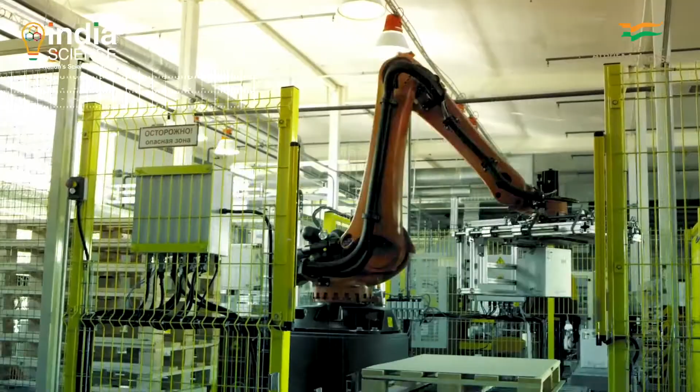With advances in technology, robotic automation is transforming the way we live and work, our efficiency and our safety levels. It is set to become the driving technology underpinning a whole new generation of autonomous devices that could provide the missing link between the digital and the physical world.

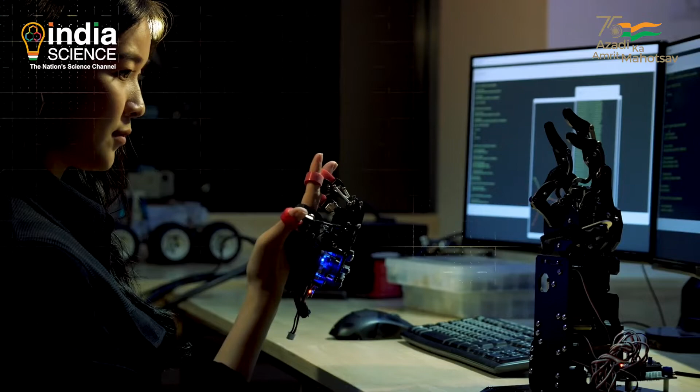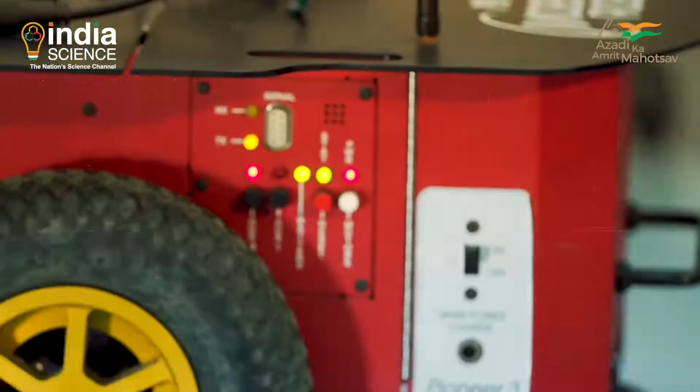How is India going to make this transition? How do we stay globally competitive and switch to smart manufacturing? What new science and innovation will power growth in this sector?

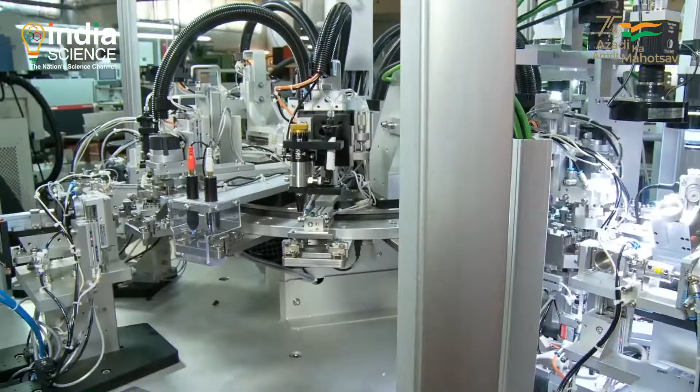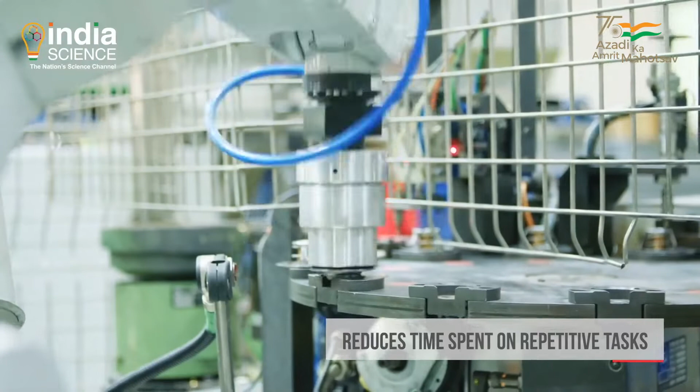Robotics is already a driver of competitiveness and flexibility in large-scale manufacturing industries. It improves worker prosperity by decreasing the time spent on exhausting, repetitive undertakings. Secondly, it improves the nature of work done as mechanical automation infers a decrease in human error.

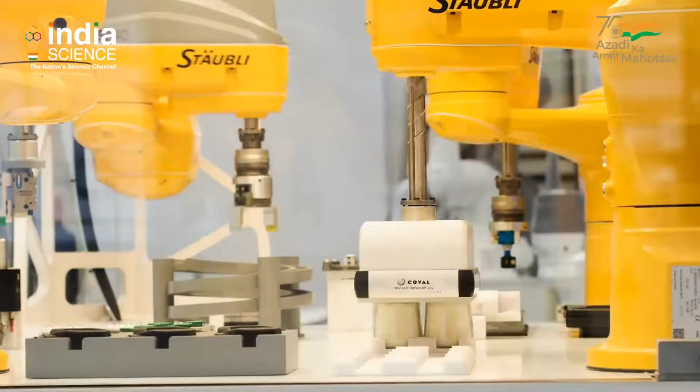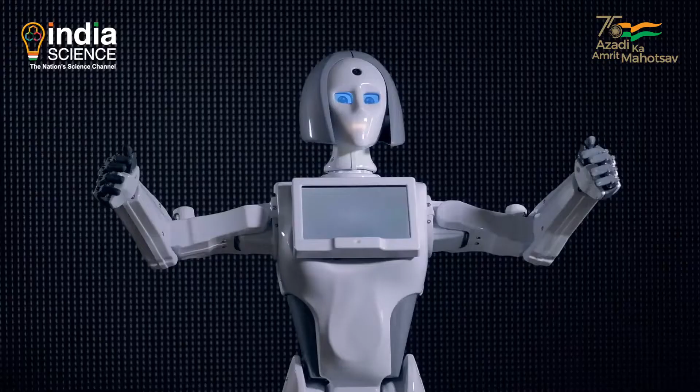The number of robots in use worldwide has multiplied threefold over the past two decades to 2.25 million, according to a June 2019 report by Oxford Economics. Trends suggest the global stock of robots will multiply even faster in the next 20 years, reaching as many as 20 million by 2030.

Robots are quickly moving out of controlled environments into homes and public spaces. In fact, researchers are also developing artificial intelligence systems that will allow robots to make decisions autonomously.

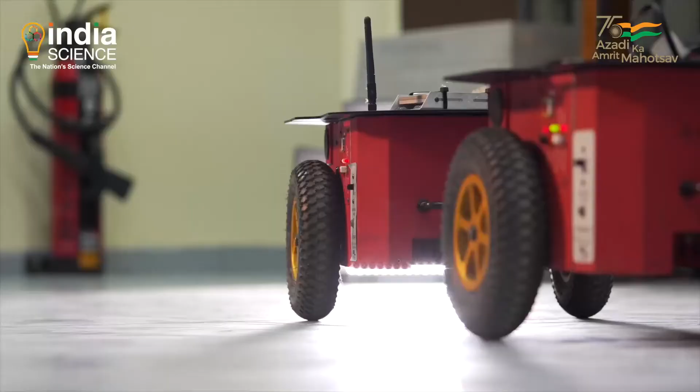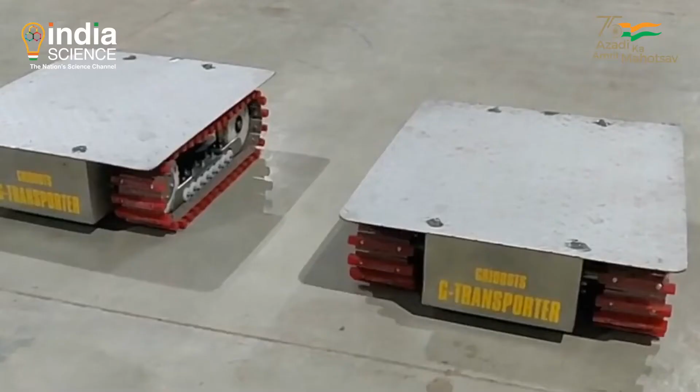Despite the fact that India has just 3 robots for each 10,000 workers, the homegrown robotics industry is developing at a remarkable rate. After the start of Make in India 2.0, many companies have come forward with their innovative ideas for robotics.

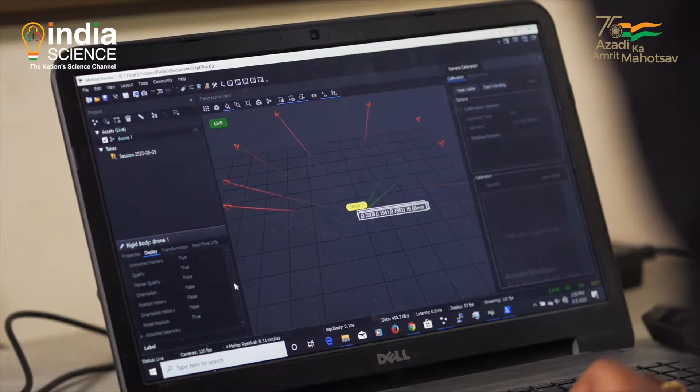One such company is Gridbots. Gridbots is an Ahmedabad-based company that was established in 2007. The company works in the field of robotics, specifically artificial intelligence and machine vision.

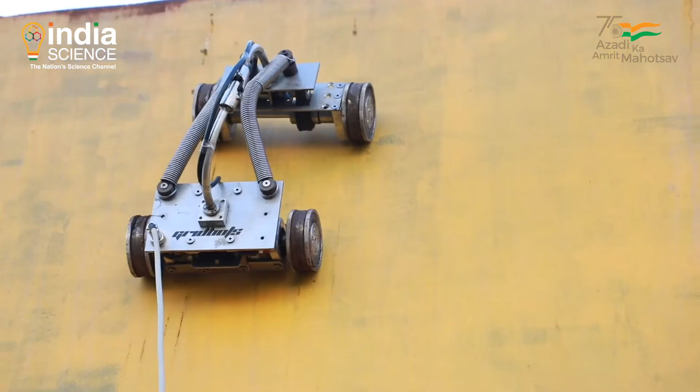The company develops robots that can be used in the industry for a variety of applications like dimension measurement, sorting and grading. Such robots are also used in outdoor work, such as surveillance in different kinds of terrain. They are capable of planning and navigating autonomously because of an inbuilt engine called the Grid Eye.

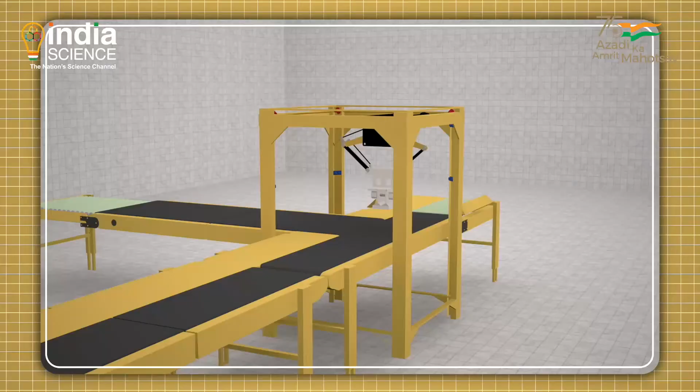Let's see what a Grid Eye engine is. The robot is able to process inputs from a range of sensors and cameras and can then plan out effective responses and actions, which include managing safety standards.

Grid-Eye engine is the outcome of 15 years of research in the field of robotics, machine vision, and artificial intelligence. We have been using multiple sensor feeds like 2D cameras, 3D cameras, LIDARs, monocular cameras, stereo cameras, and trying to build an algorithm which can help a machine perceive its environment the way a human being does.

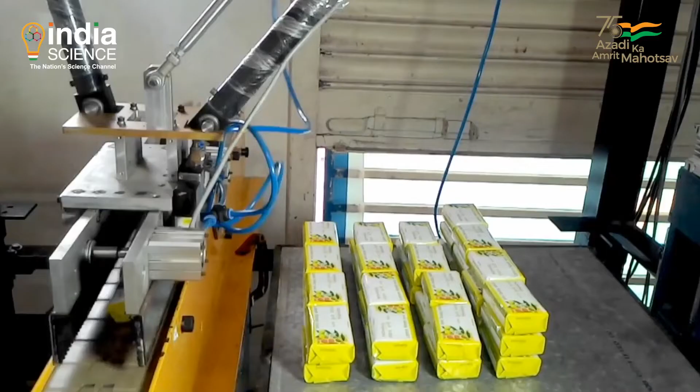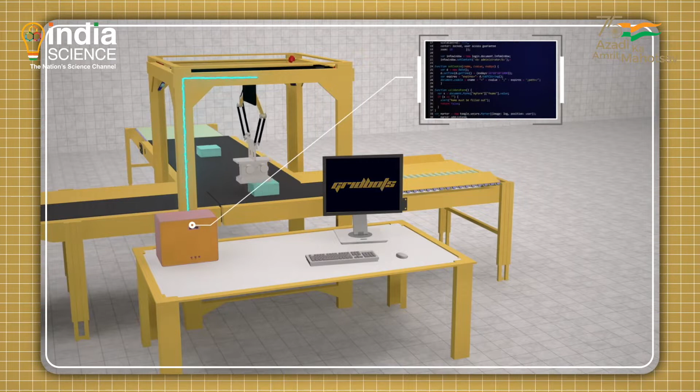How exactly does this work? There is an algorithm that helps the robotic device assess the environment and collate data from it. The data is then sent to the processing engine, which filters out the required data and processes it at a very high speed. Based on the data, the robot undertakes the task. The processor has a high level of accuracy that helps these robots to work efficiently and safely.

First of all, you have to identify multiple objects which are present in the video and then segment them, exactly how they are positioned in the 3D coordinate system, and then take actions. This has to be done in a fraction of a second, which becomes very challenging for today's hardware without a very good algorithm or software running at its core.

With Grid-Eye, we have been able to solve this problem. Today, most of our robots are being powered with the Grid-Eye engine, which helps our robot to work in the industry the way a human being or a human laborer works.

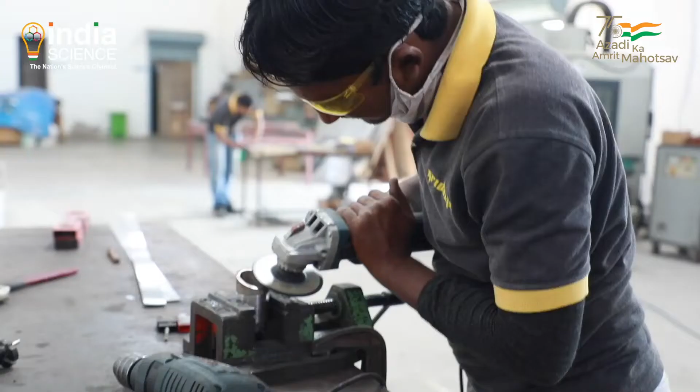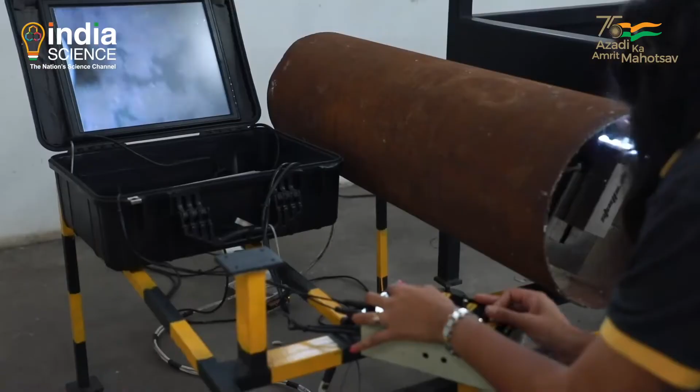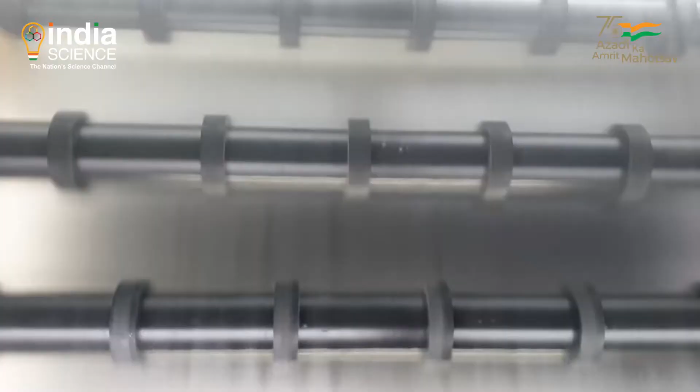The team at Gridbots creates robots, designing them to suit a customer's specific requirements. With indigenous research and manufacturing capabilities, Gridbots has deployed robots for almost all segments of industry and is targeting international markets. Some of the sectors where our robots are operational are glass, solar glass industry, manufacturing industry, food industry, pharma industry, electronics manufacturing industry, and warehousing.

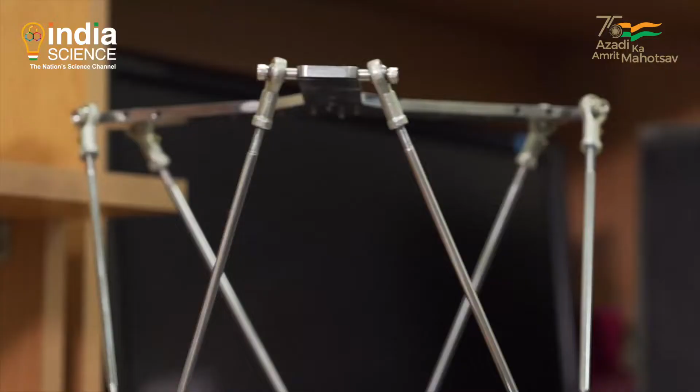What defines the company is their research and development. About 80% of their revenue goes to R&D. The robots made by Gridbots are economical, costing a fifth of those available in the market.

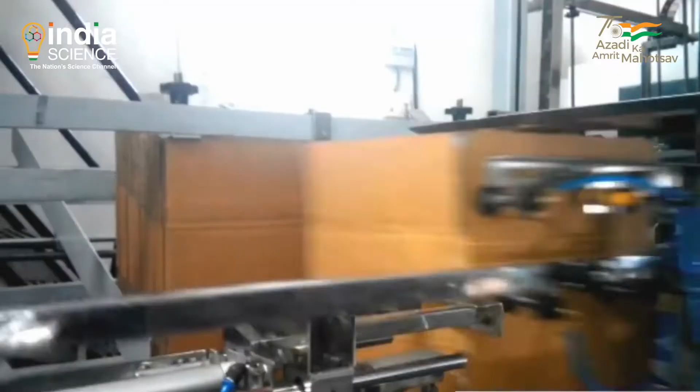You need to have an edge over your competitor. That edge can only come with dedicated, in-house research, which has to be there with every industry. These industries should be investing a lot in research and ensuring that their products, services, or technologies are way ahead of their closest competitors. That is the only way to survive and to grow with this vision of Atmanirbhar Bharat.

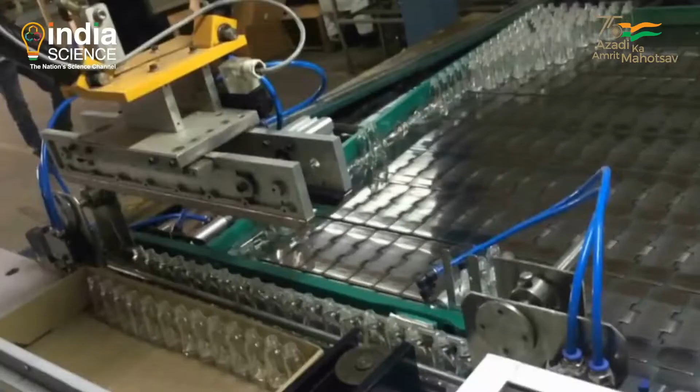Gridbots helps a lot of different industries by providing robotic solutions and machine vision that increases efficiency, working speed, and helps clients reach goals in a time-bound manner.

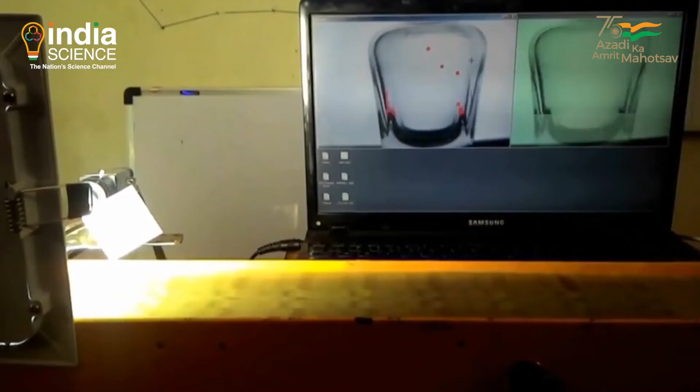First, the Gridbots engineers visited our factory, our warehouse, and then they came up with the solution. They elaborated that they have a system capable of automatically transferring material, and that robotic arm is also capable of picking material from the ground or at some height.

Around 90% of their work is for the government. Their customers include the Ministry of Home Affairs, the Indian Navy, ONGC, ISRO, IIT Gandhinagar, etc.

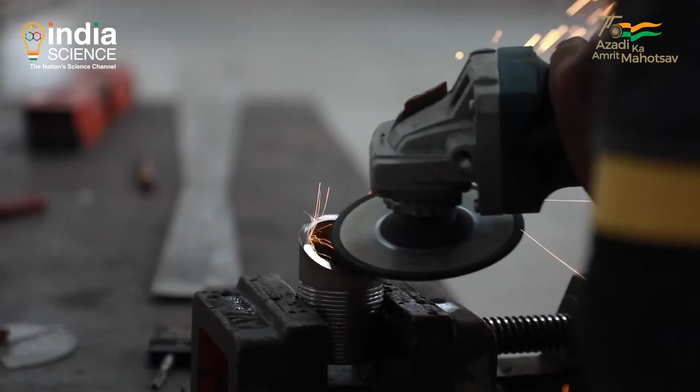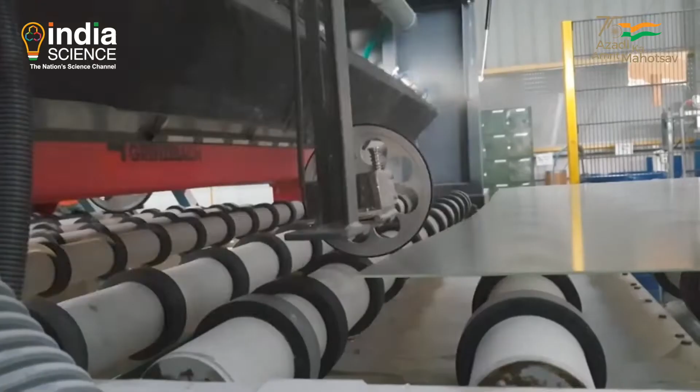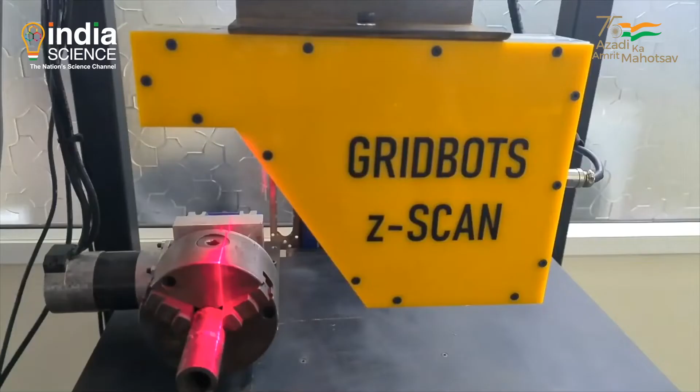Apart from making robots for different applications, Gridbots also works on machine vision systems, in which they make various products under different categories. A range of inspection systems including glass inspection, welding inspection, fabric inspection, and 360-degree tube inspection solutions are made. Geometric MegaView, MicroView, and Z-Scan solutions are developed under dimension measurement solutions. A range of vision systems are developed to cater to different applications in various industries.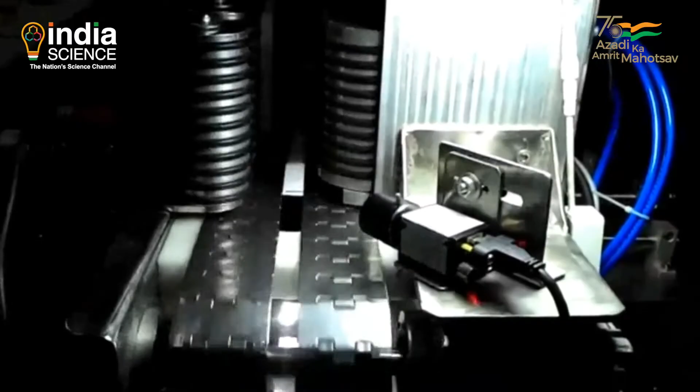Over the years, many such products have been developed that have been sold within the country and even outside the nation. When we say Atmanirbhar Bharat, we are talking about competing in global markets. In the global markets, we know that there are big players already established. What we are talking about is the volume first, the quality of the product second.

When you're talking about quality of the products, at that point it is necessary that we switch the traditional way of working and adapt ourselves to something which takes care of the quality and the volume autonomously. Automation is the way to go.

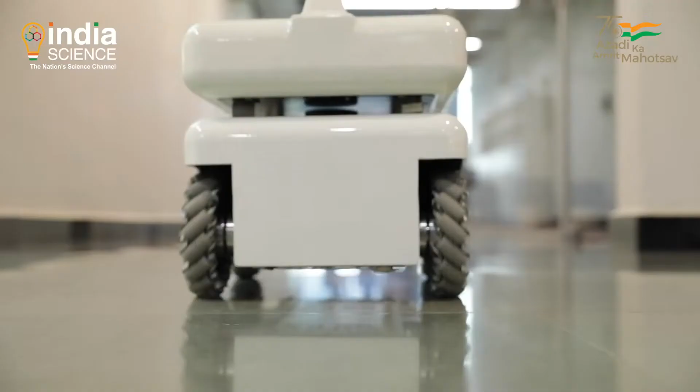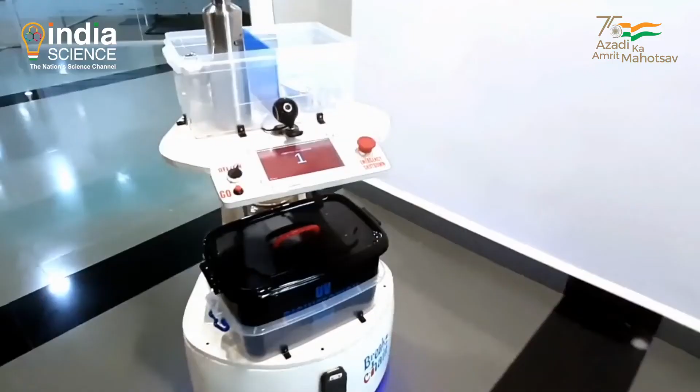After the break, another cutting-edge Indian startup that created robots that helped in hospitals during the COVID pandemic. Robots that help in the service industry. What technology powers these robots? Keep watching to find out.

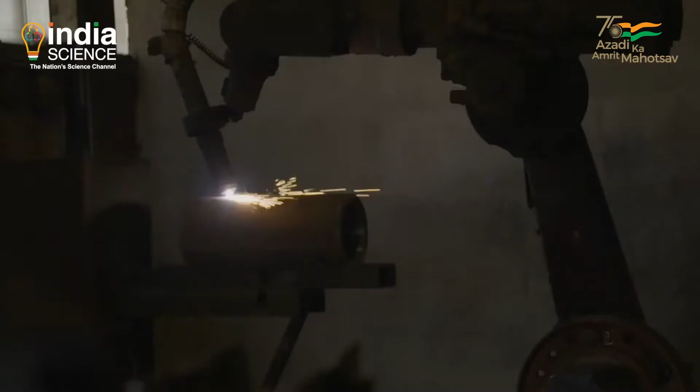We have seen how robots can be used in various industries. Today, there are also a host of service robots engineered to automate menial, time-consuming or repetitive tasks, thereby releasing human workers to accomplish more intellectual functions. These can be used anywhere from hospitals to hospitality.

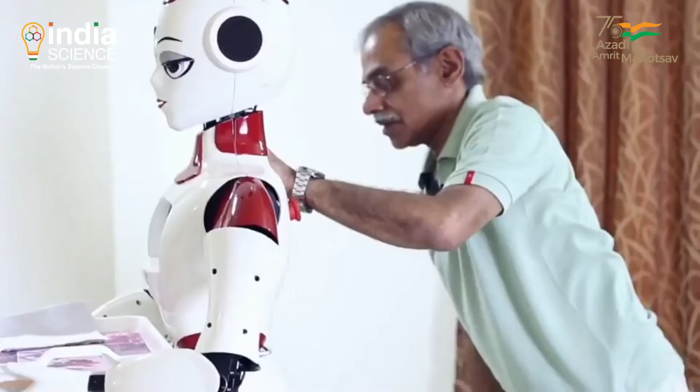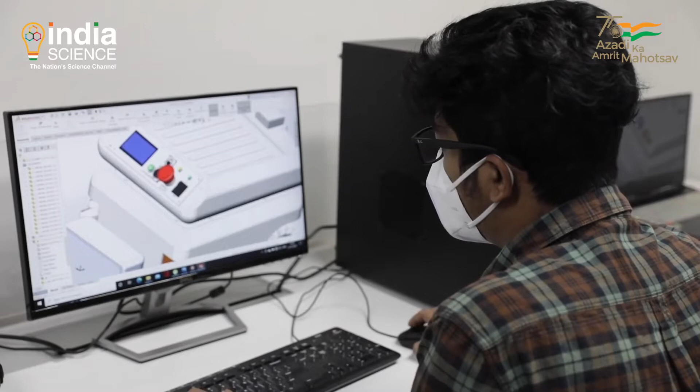Asimov Robotics, a Kochi-based company, has been manufacturing various robots since 2012. Their vision is to use technological and software innovation to make certain sectors safer and more efficient by increasing the quality of service.

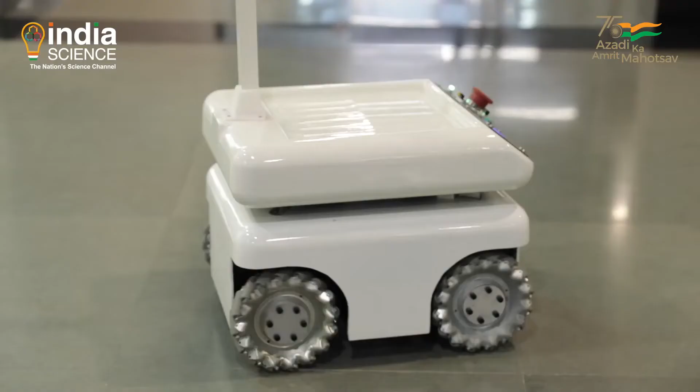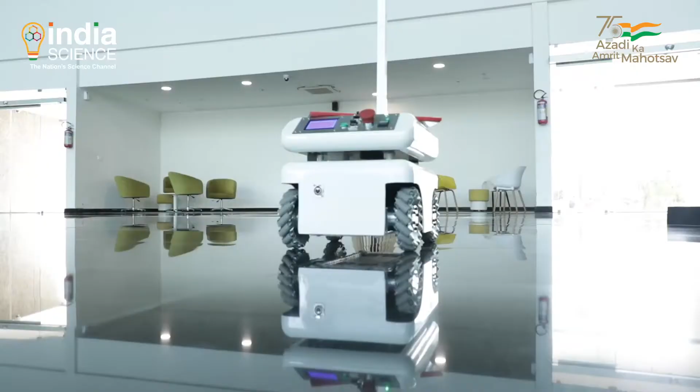They have created robots that can assist humans by taking care of day-to-day jobs in sectors like healthcare, retail, hospitality, and security. Most of the robots that the team at Asimov developed have been created to work alongside humans. They can coexist and cooperate, and also have to exist with each other in the case of cobots.

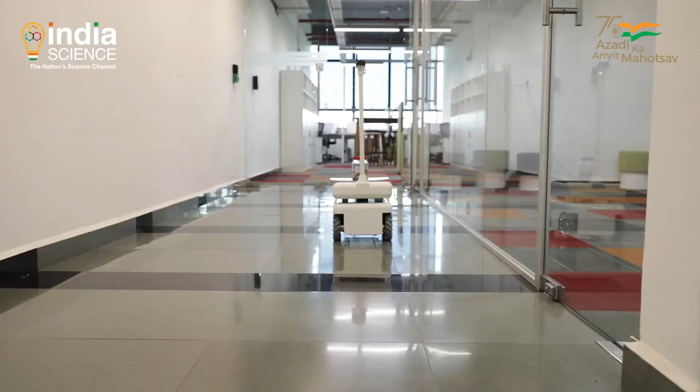The science behind this technology is primarily, if you look at the mechanics, the hardware of the robot, kinematics and dynamics. Primarily the structure talks about how much freedom a robot requires to do a job. So we design a robot accordingly, based on the task and the requirement of dexterity for that task, and then we design the robot.

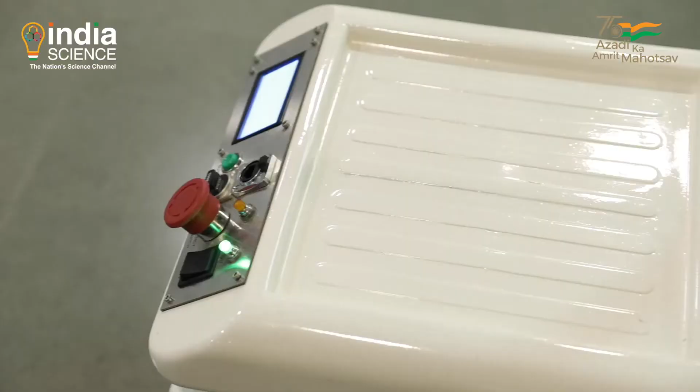Let's explore some of Asimov's robots. They have service robots that are used mainly in inter- or intra-departmental logistics. For example, small robots can carry heavy items to be delivered at a distant place within the organization. There are robots for contactless delivery and some that look like humans and take care of hospitality.

They have collaborative and cooperative robots who work together performing various functions in different settings. The human aid robots work alongside humans, tracking the environment with the help of sensors and collating information to respond to queries. You can see them operational in the front office, greeting customers, printing visiting passes for customers, and answering FAQs.

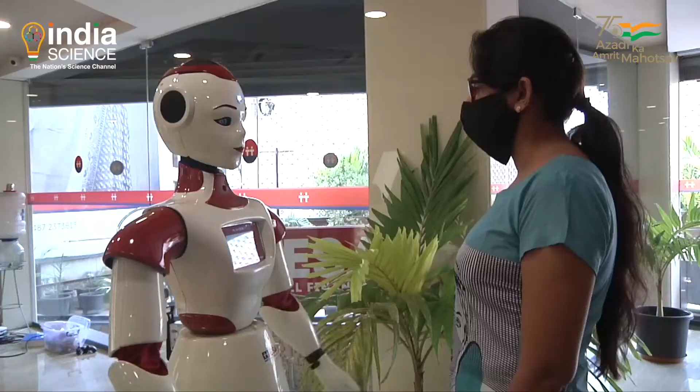ESAF Bank introduced this robot two years back, basically focused on customer service. Customers coming to the lobbies can have different questions, different doubts, and those things can be answered through this robotic process, which also helps my staff serve customers better. In certain cases, the robot helps us direct customers to which counter they should go, so customers get the joy of better service through the robotic process.

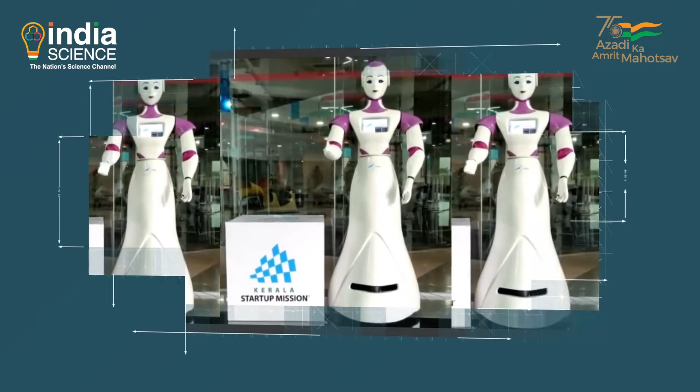These robots also have the capability of ensuring COVID-19 protocols like taking body temperature, checking for face masks, dispensing hand sanitizer, and ensuring social distancing inside the bank premise.

The hardware of these robots is created using kinematics, which is the study of all the possible motions of a robot. Each robot has multiple sensors like lidars, proximity sensors, 3D point cloud cameras, and GPS, all fused so that the robot is able to compute its trajectory.

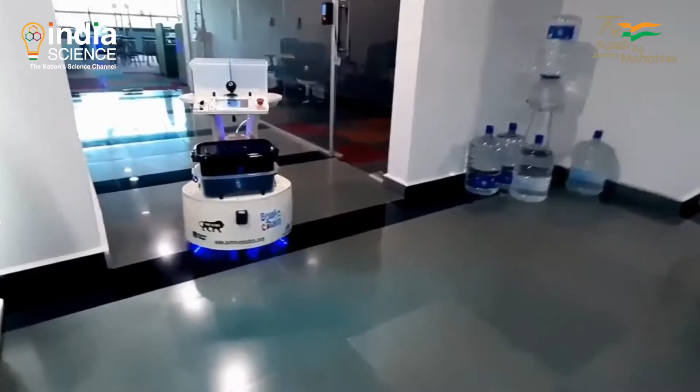For example, in the case of a logistics robot, autonomous navigation is used to control movement from point A to point B, understand the floor plan, and avoid dynamic obstacles in warehouses.

When it comes to manipulation, kinematics is used to compute where the robot has to go, ways of executing the task, and determining the end effect of the job at hand. A lot of math is used to plan these functions.

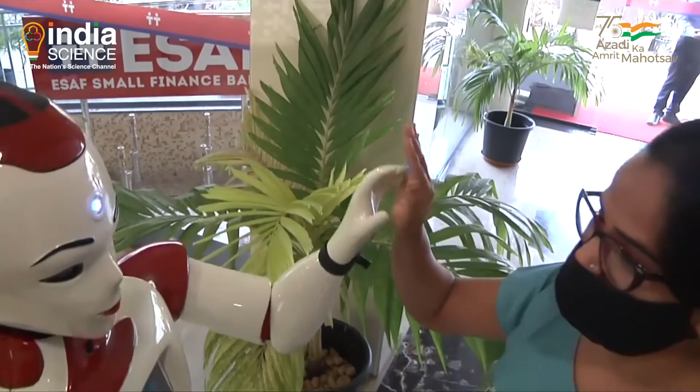Most of the robots at Asimov use AI, or artificial intelligence, for functionality. Without AI, a robot is just a framework with some electronics. For navigation, sensor fusion and AI is used to decide the best trajectory.

Front office robots that interact with humans use natural language processing and face recognition, both of which are AI-powered functions. This helps them navigate numerous interactions. Each robot is also engineered to be self-learning, so it can optimize performance in the long run.

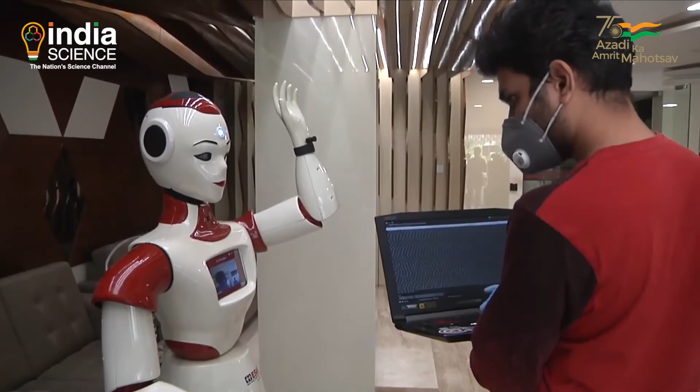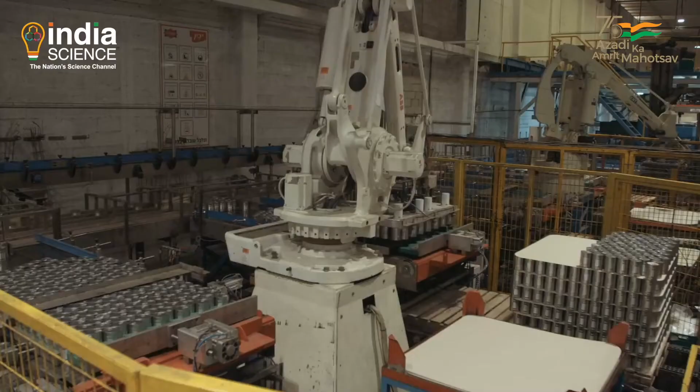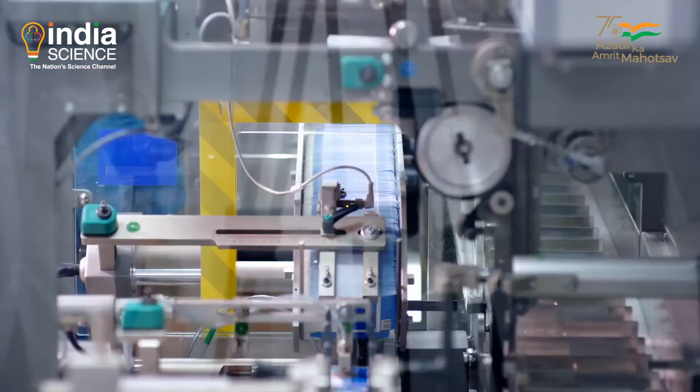While previously India was regarded just a stronghold in math and software engineering, countries like China were at the helm of manufacturing industry. However, with the introduction of robotic trends in India's manufacturing industries, many key functions are being filled through robotics and automation to increase productivity many-fold.

If you look at the industry, take an example of manufacturing industry, you can see that every day the requirement is changing. If you look at the automotive manufacturing industry, you can see that there will be a facelift. Every day the model is different, functionality will be added.

So to address that, we can only do it with the help of the Industry 4.0 revolution, which is a connected manufacturing environment where robotics is a key enabler.

It is not the ordinary robots which were there earlier, working inside the work cell, but this robot is actually going to cooperate with human beings. Today's robots are capable of doing that. So that is actually going to revolutionize the manufacturing industry and increase productivity and quality.

So thereby definitely the economy will be getting benefited. Robotics can clearly play a big role in India's self-sufficiency journey.

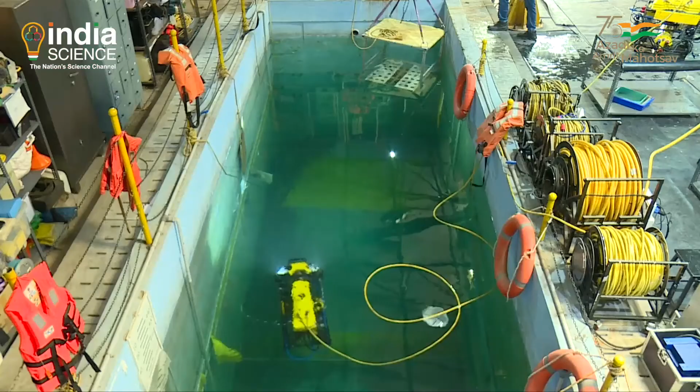After the break, a unique enterprise that designs robots that take us underwater. Why is this such a big area of work? How do we create robots that can man underwater functions? All this and more right after this break.

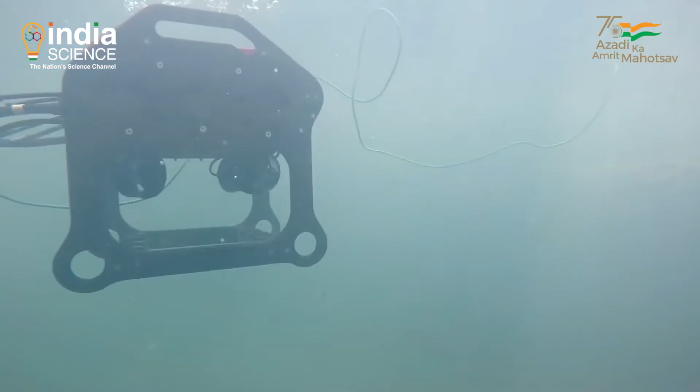An interesting space where robots are now being used a lot is in underwater applications. Underwater robots can play an important role in the offshore oil and gas industry, the defense sector, maritime research and rescue, oceanographic research, underwater archaeology, and environmental monitoring. Underwater robotics is making exploration cheaper and more accessible.

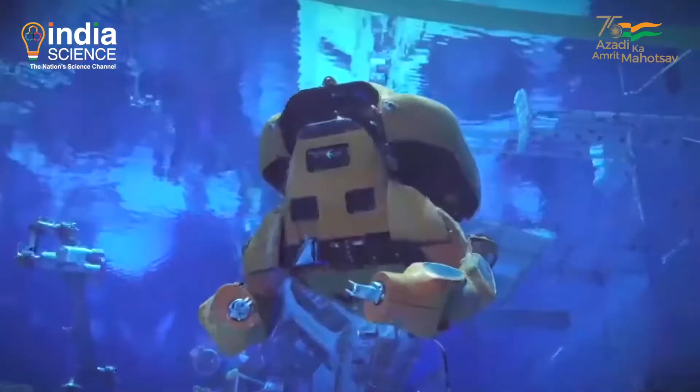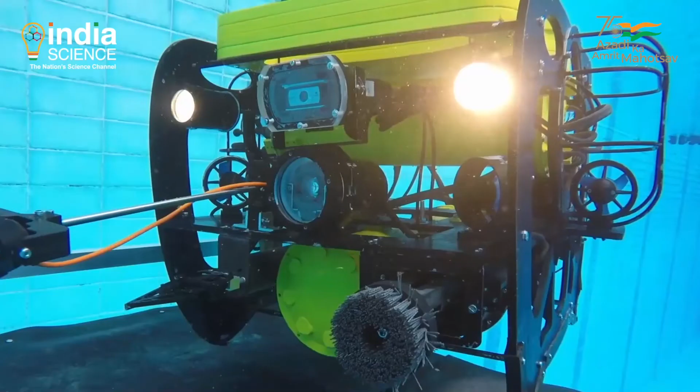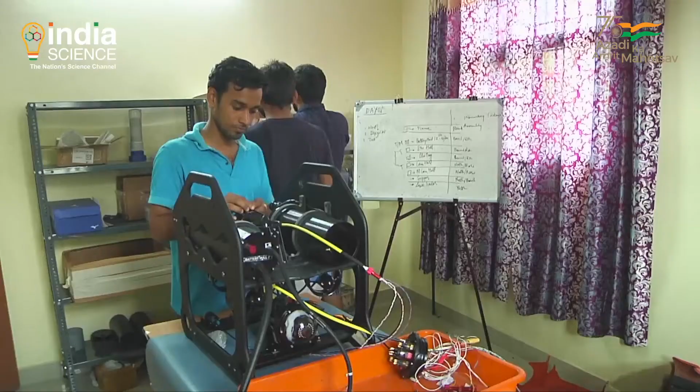However, this market has been largely untapped in India, with little or no technological developments to explore the potential. However, in the past recent years, there has been some work done in the area of underwater technology, with several Indian startups coming forward with scientific innovations to push India's marine robotics.

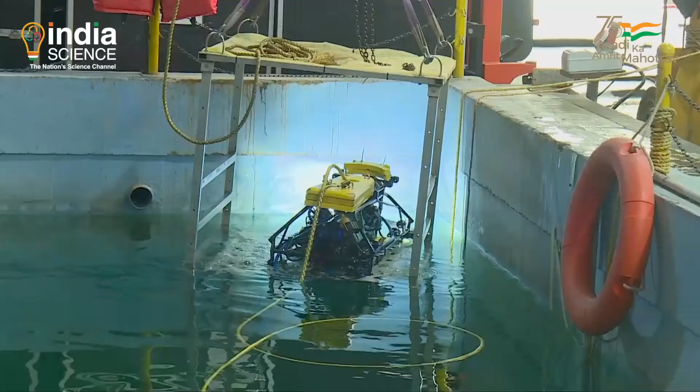One such company is Chennai-based Planys Technologies. This technology startup provides underwater robotic inspection and survey solutions using indigenously manufactured remotely operated vehicles, or ROVs. Started by a group of innovators at IIT Madras in 2015, Planys is the first and currently the only original equipment manufacturer of ROVs in the Indian subcontinent.

If you look at the Indian coastline, that's around 7,500 kilometers, which is a huge potential for a country like India to venture out in the open ocean and make use of the resources that are there, in terms of economic exploitation as well as in terms of defense security.

So, driven by these two motivations, we started Planys with a goal to build underwater tech that can be used for beginning with underwater inspection. It can be taken to defense and other economic sectors as well.

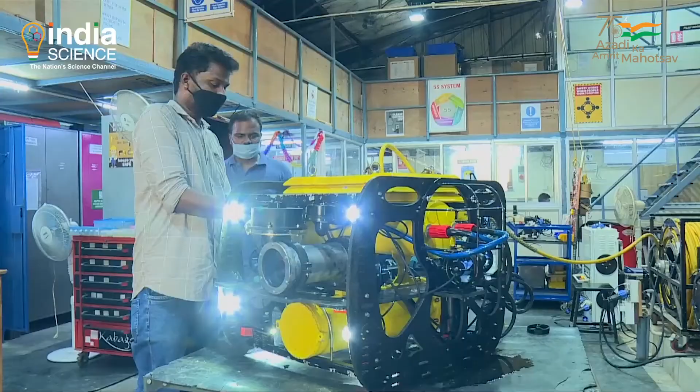Planys Technologies doesn't just make devices for underwater mapping, but provides start-to-finish solutions for any of these customers. These solutions are powered by 4 core elements.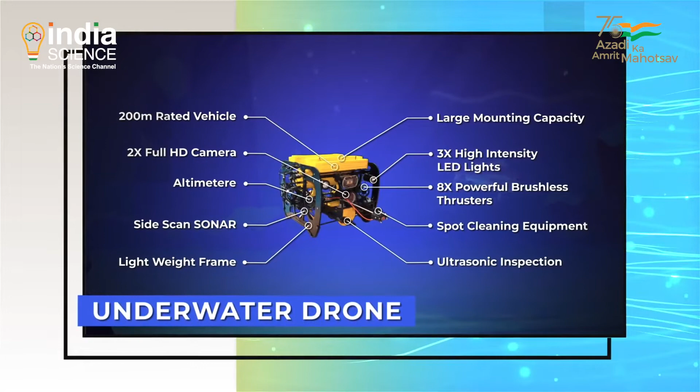Data capturing techniques are key. The value through all these operations is the data that is captured. The data is accessible on a digitized reporting platform, a data representation platform, where all the data is displayed and recorded for further processing. Planys has the first of its kind AI-enabled data representation platform.

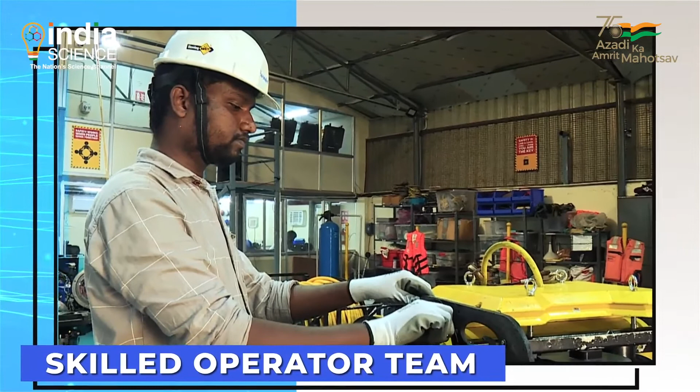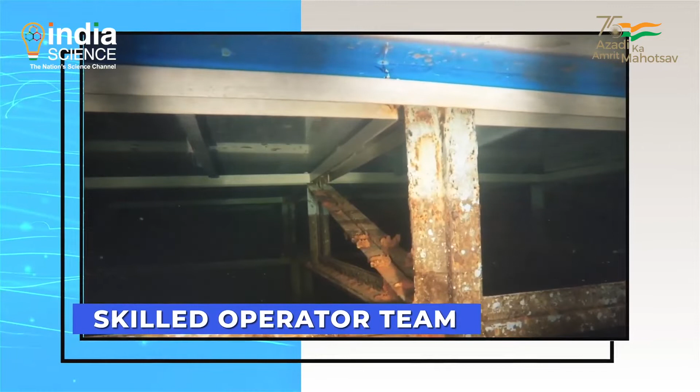Finally, a skilled operator team has been trained for several years to operate the remotely operated vehicle, ROV, in different kinds of environments like open waters, offshore, and confined spaces. The operator team is trained to operate, get the right data, and present it in the right format to the client so that data-driven decision-making is much more feasible than it was earlier.

One of the fundamental challenges Planys noticed in the market was misorganization of data, or in some cases no organization at all, which is a significant limiting factor for any asset owner in making data-driven decisions. Our data organization platform organizes the data, stores it for long-term use, and provides meaningful interpretation that helps decision making, allowing comparison of various perspectives and ensuring the right decisions are taken at the right time.

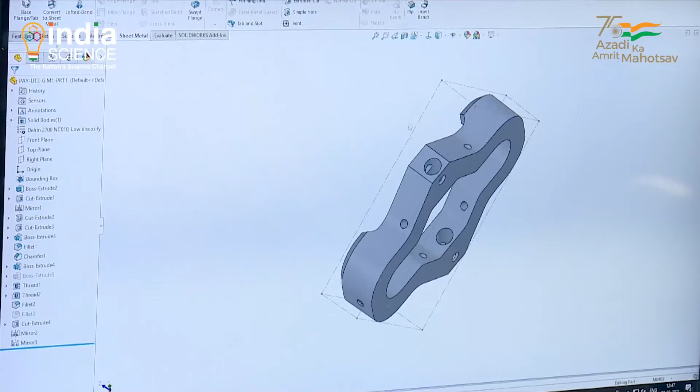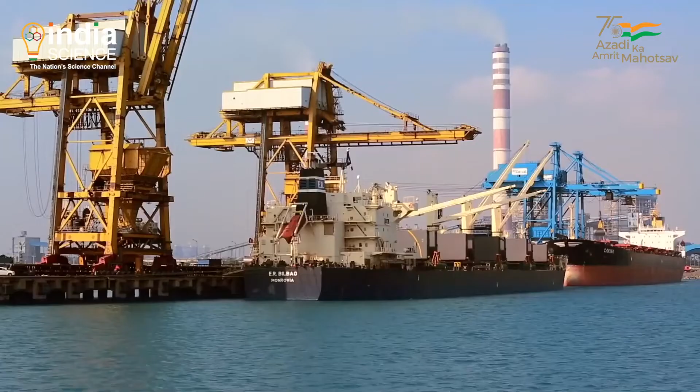So how exactly does the team put together these robotic solutions? They conduct a site visit where state-of-the-art methods are used to understand environmental conditions, structural conditions, and methodology to retrieve data for the client. This information is used to configure the ROV and its systems, the payloads and the sensors.

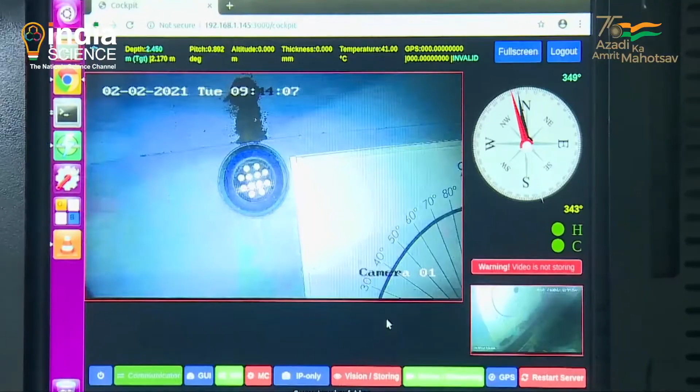The appropriate launch and recovery method is deployed and the ROV is steered to the right location where the inspection has to be carried out. Once the ROV reaches the location, the client is also invited to witness the inspection in live conditions. Then the data is recorded, and the same routine is repeated till all the required data is collected.

The team brings back the data to process, filter and streamline it. It is then uploaded on the digital reporting dashboard.

Planys is currently working in different sectors such as offshore, nearshore and onshore. Offshore projects include inspection of jacket platforms, offshore gas structures, and single buoy moorings (SBMs). In the nearshore sector, Planys provides tech solutions for ports, harbours, jetties, terminals, and the oil and gas and shipping industry. In the civil or onshore sector, they inspect dams, irrigation channels, bridges, and also work in the processing industry for inspection of pipelines and storage tanks.

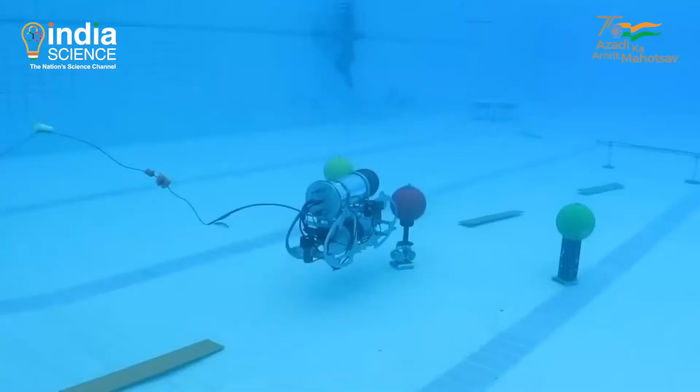Planys now has products with specific types of ROVs for different applications. These include a special series for pipeline inspection, tank inspections and open water inspections.

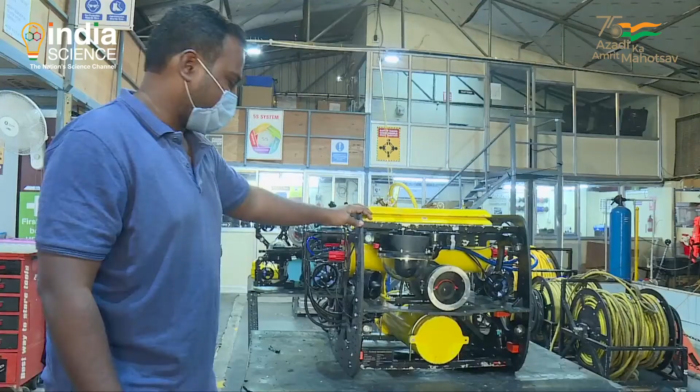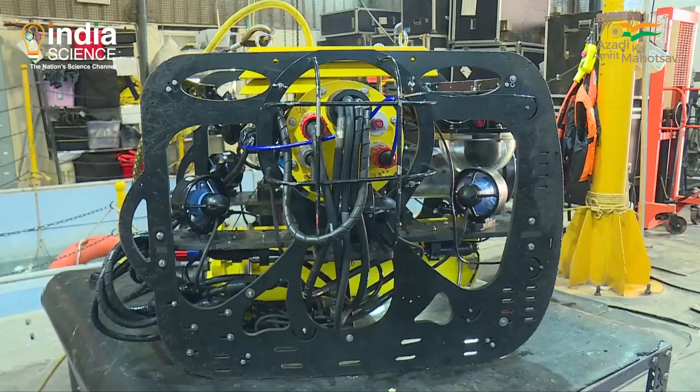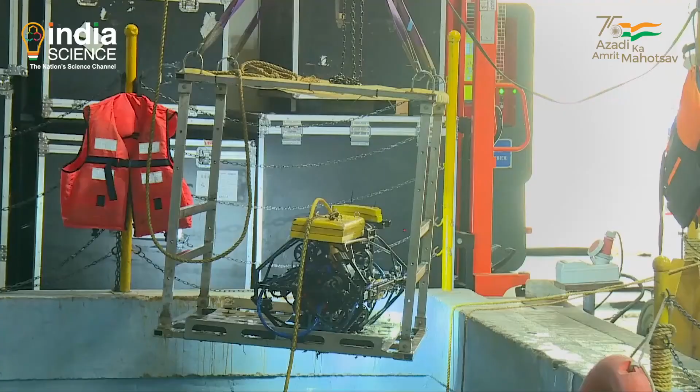Planys has a complete in-house team that engineers, manufactures, assembles, tests and runs the product. The raw materials, components and devices are mostly made by Planys or obtained from other local players, and very occasionally imported. The company's goal has been to not just develop products in India, but also to take them across the globe.

Planys has been able to push scientific innovation that has brought India on the map for marine robotics and underwater surveillance. Planys Technologies is currently operating not just in India, but in 4 different geographies including the Middle East, Singapore and Europe too.

I think the Atmanirbhar vision is an excellent initiative. We believe that it is driving a change in the way key decision makers in India think about the usage and deployment of technology in day-to-day applications across different industries. This is very much visible from the fact that procurement norms for deployment and purchase of indigenous tech are now focusing more and more on companies or products that are developed and built in India, which is a very key motivating factor for startups and small companies like us.

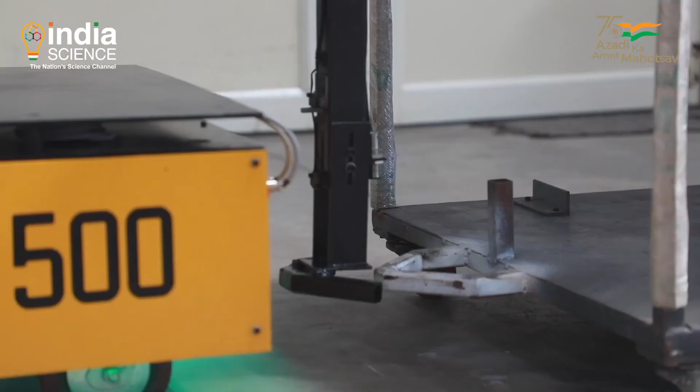Science and technology in new arenas like this can push India's development in the global arena. Institutions, both in the public and private spaces, that emphasize scientific innovations can push our economy and propel our journey to self-sufficiency.